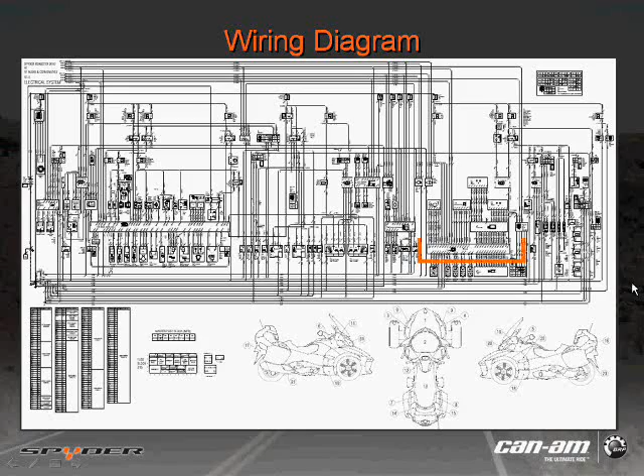Okay, Rich, we're going to start today's training session with component location and how to read the schematic. We'll imagine we're looking at an area of the schematic, and we'll see here RDO 1-25. That would be radio connector 1, terminal number 25.

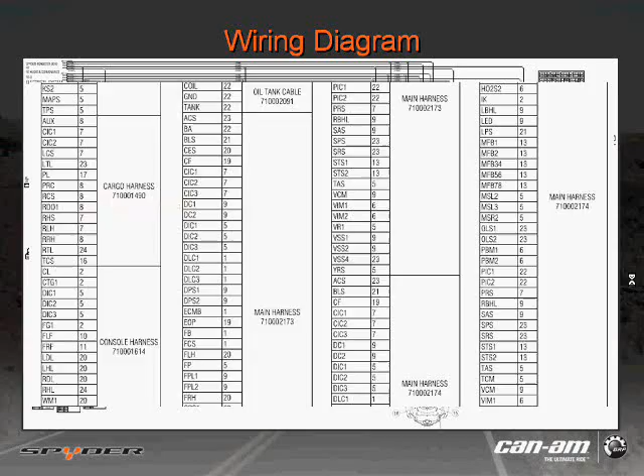To find where that connector is located, go to the bottom left of the schematic and read the small chart. Find connector RDO1 and then reference the small area location number next to it. In this example, it's number 8. Then reference number 8 in the Vehicle Location Area Callout section of the schematic. Here we'll see number 8 is located underneath the right rear.

Next, we're going to reference the area next to the connector location chart, and we're going to take a look at the fuse boxes. This shows the location of the fuse boxes in the rear, or master fuse block, and the front fuse block, known as FB. You can use these to reference the locations of the different fuses on the vehicle, and also the relay locations are located here. In addition, you'll see a series of numbers underneath the lower fuse block from 1 to 12 from left to right, and A to E from bottom to top on the left of the small picture. This is used to determine the terminal locations in the front fuse block.

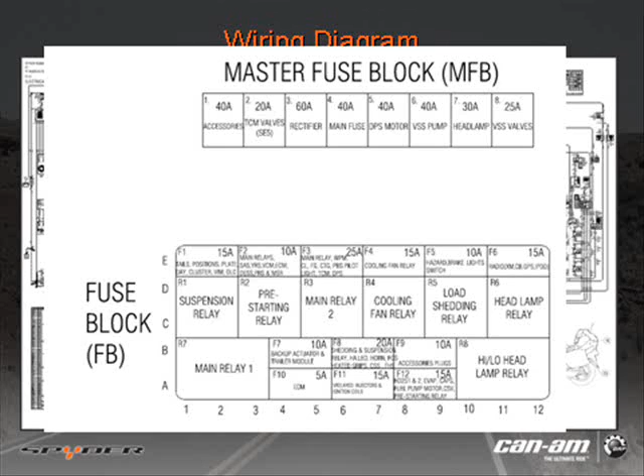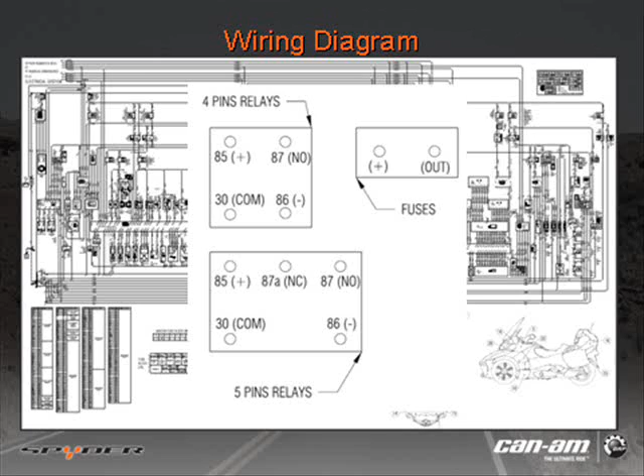Now let's reference the area to the right of the fuse box locations. These are the relay terminals and fuse block terminals as viewed from the fuse block, not from looking at the relay or the fuse itself. The illustration on the top right shows the location of the fuse terminals in the fuse block. On the left is the positive or power supply into the fuse, and on the right is the power supply path to the component from the fuse.

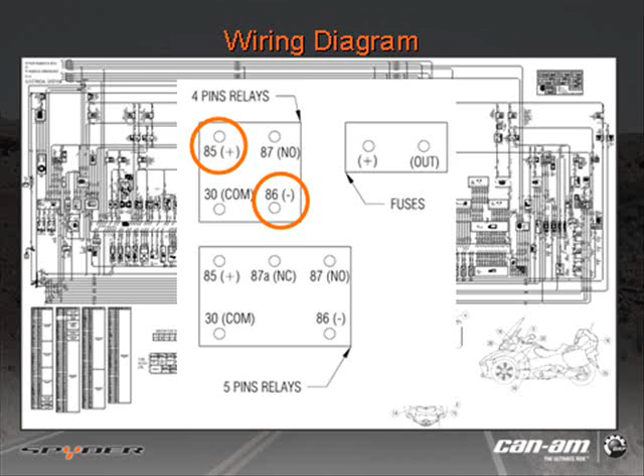Next, let's reference the illustration on the top left. This would be the terminal locations in the fuse block for a 4-pin relay. Note the numbers 85, 87, 30, and 86. These are the numbers that are on the relay, but remember you're viewing it from the fuse block, not the relay. There's two small circles, one on 85 and one on 86. The 85 is the positive side coming into the relay for the low current side, and the 86 is the negative side, or path to ground, controlled normally by some type of module to turn the relay's low current side on. The low current side is the side of the solenoid with windings that, when energized, create a magnetic field and either open or close a switch. In this case, it closes the switch in these relays.

Now it's important to note that the terminal locations circled here are not the locations listed in this 4-pin relay illustration. We'll reference the load shedding relay to explain this. Note that the power supply coming into the low current side relay at position 85 is in actuality FBD9, which if you look at the reference illustration, you'll see the incoming current side, location 85, is at the top left. Also note that the ground path for the relay to activate the low current side would be the negative one at number 86, but in actuality it's connector FB terminal C10 in the fuse block. Just remember the terminal numbers 85, 86, 87, and 30 are not marked on the schematic.

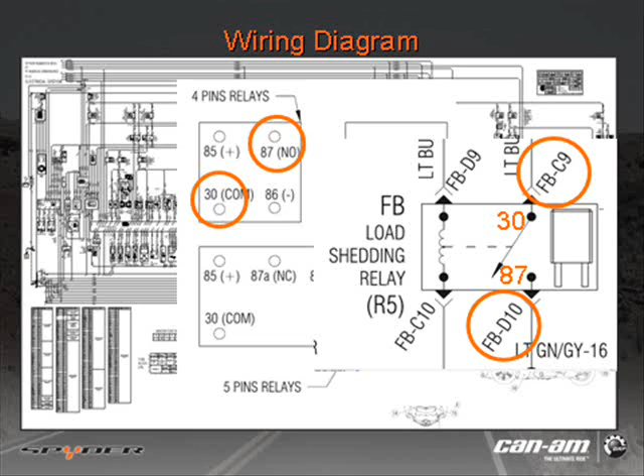Moving on to the high current side or switched side of the relay, number 30 is the common or incoming power side for the switched side, and number 87 is the side the current leaves the relay and goes toward the component it will operate when the relay is energized.

Next, let's reference the terminal locations in the fuse block for the relays. If we reference A to E from bottom to top and 1 to 12 from left to right, we can determine the accurate location of the terminals.

Patrick, it's important to remember that the illustration of the relay is there to show how the relay works. Even though it appears that D9 and C10 are directly across from each other, in actuality, on the relay, they are diagonal from each other. So if you look at the fuse block and see C9, D10, C10, and D9, they're actually diagonal from each other. The reason the relay is wired that way is so you could install it in either direction and it'll still work the same way. This normally only applies to 4-pin relays, and we'll talk about a 5-pin relay a little later.

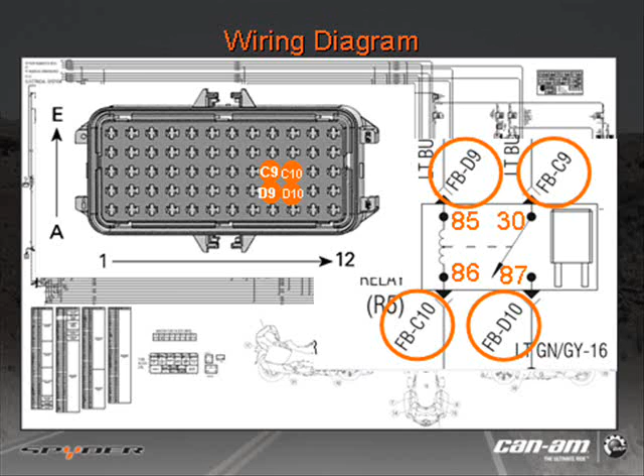Well, look at that, Rich. The next slide is the 5-pin relay. For this explanation, we're going to use the high-low headlamp relay R8. A 5-pin relay can be used for 2 outputs, one in the energized position and one in the unenergized position. We'll explore that in a moment.

First, let's take a look at terminals 85 and 86, which are still the low current side of the relay, and we can see their positions are diagonal when viewed in the fuse block. Now let's look at the high current side of the 5-pin relay. Number 30 is the incoming power or current, but we have 2 possible outlets, number 87 and number 87A. Number 87A is used as the outlet path through the relay when the relay is not energized. On this next slide, we'll see that with the relay energized, 87 becomes the outlet path for the current.

Okay, Pat, even though it seems like we're rambling on about relays, it's extremely important to understand the purpose of relays, how they work, how they are illustrated on the actual wiring diagram, and where the actual pin locations are in the various fuse blocks. This is absolutely critical when diagnosing components or circuit issues.

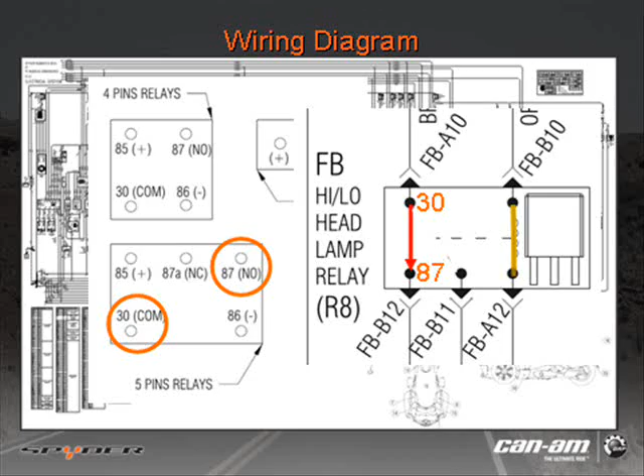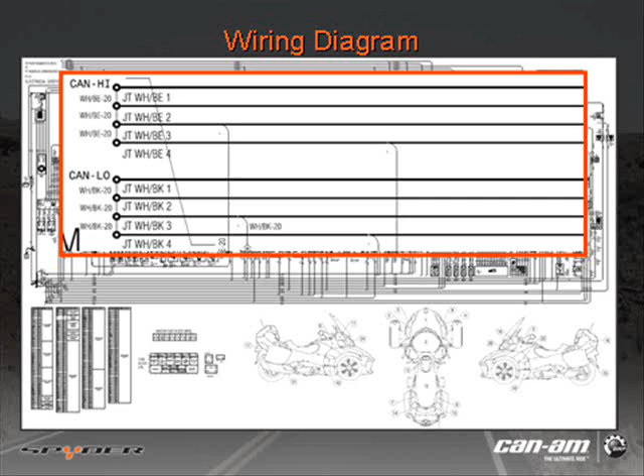Okay everybody, next we're going to continue reading the rest of the schematic. We'll begin with the top, where you'll see the circuitry for the CAN high and CAN low communication wires.

The CAN, Controller Area Network Protocol, is an ISO standard for serial data communication, developed for automotive applications. The CAN bus links several ECUs and sensors in the vehicle's electrical system. Two wires connect each component, constantly communicating at a rate of about every 25 milliseconds. The white-black wires are CAN low, and the white-beige wires are CAN high.

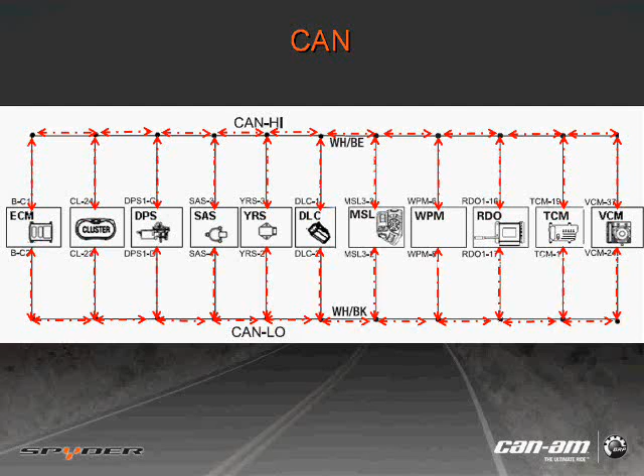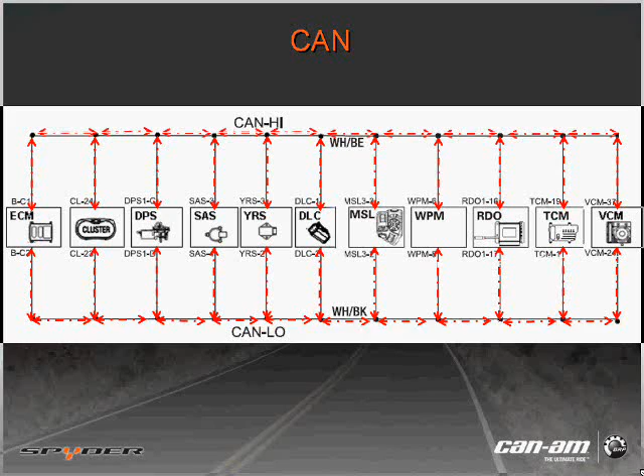The CAN wires also provide communication with BUDS when connected through the diagnostic connector. Consider the CAN wires like a telephone line where the modules are constantly talking with each other really fast so they can stay updated on the latest information and take action as necessary.

The CAN bus system integrates several electronic control units into one communication loop. The units in communication are: the radio, the RECC or multi-function switch left, the cluster, the WPM windshield and park brake module, the ECM, the DPS dynamic power steering, the SAS steering angle sensor, the VCM vehicle control module also known as VSS vehicle stability system, the TCM transmission control module if so equipped, and the YRS yaw rate sensor.

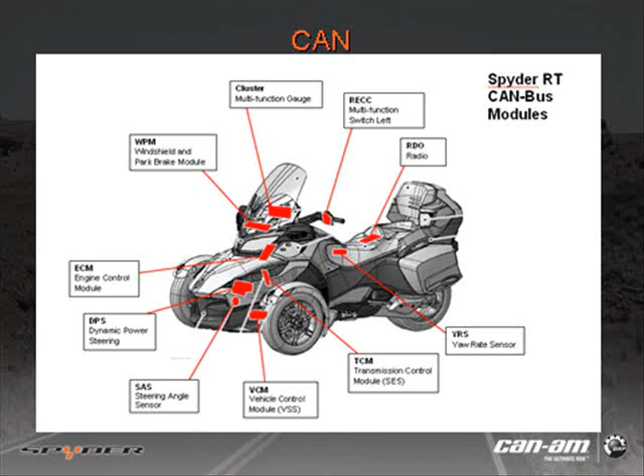If we look at the upper right corner of the schematic, we'll see a small area that lists the switches in the left multifunction switch that use CAN communication. Remember, these switches can only be tested with BUDS.

In addition, the signals from the cruise switch located on the right multifunction switch are sent to the left multifunction switch, and those signals are also converted to CAN. Let's make it clear that the cruise control switches on the right-hand multifunction switch are normal contact switches, and they can be tested with a multimeter at normal wire and connector locations as identified by the wiring diagram. Once these connections are made at the multifunction switch on the left, they are converted to CAN inside that module.

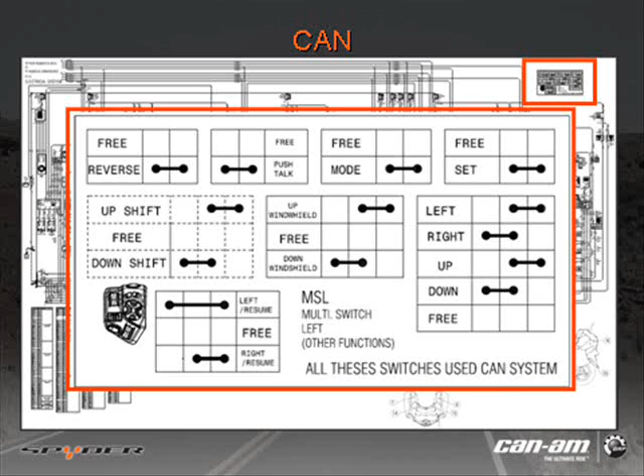Now moving down the wiring diagram, the next thing we see are the high amperage fuses. These are located in the back of the vehicle, and they're the very high amperage or large square fuses. They're all connected to a large bus bar directly connected to the battery. They feed the main power to the main fuse assembly, the lights fuse, TCM solenoids, DPS motor, VCM valves, the VCM pump, and the main accessory fuse.

Next down the wiring diagram, you'll see the lower current fuses, which are in the front fuse block. There are several accessories and components operated with these fuses, and the fuse locations and wire terminal connections can be identified from this wiring diagram.

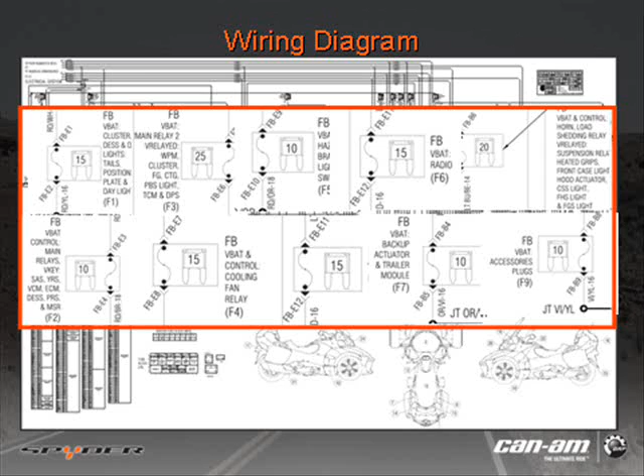For example, take a look at the accessory plugs fuse over to the right of the screen. It's a 10 amp fuse. We can see that fuse is in location F9, fuse location 9. Its terminal connections are FB B9 and FB B8.

Even further down in the wiring diagram, we see the next row, the relay section. Here you can see the main relays, the cooling fan relay, the headlamp relay, and the load shedding relay, which Patrick will talk about a little bit later.

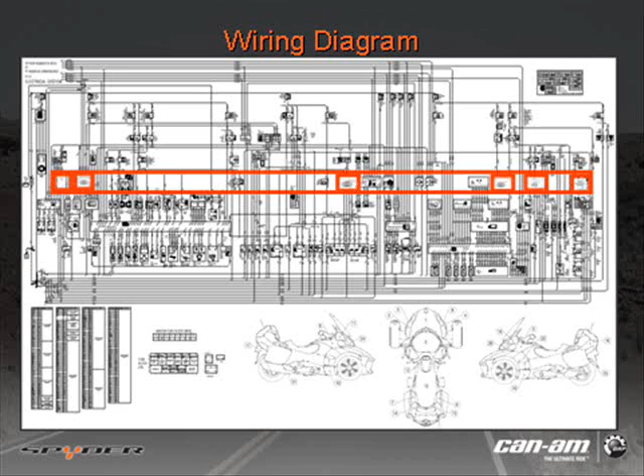I'd like to talk about the next portion further down the schematic, because this area can be confusing for some technicians. What you'll see is some components are split up into different segments. I'm going to use the cluster as an example.

The multifunction gauge or cluster is split up into several areas across the schematic. You'll see that it's actually split into 6 separate segments across the schematic.

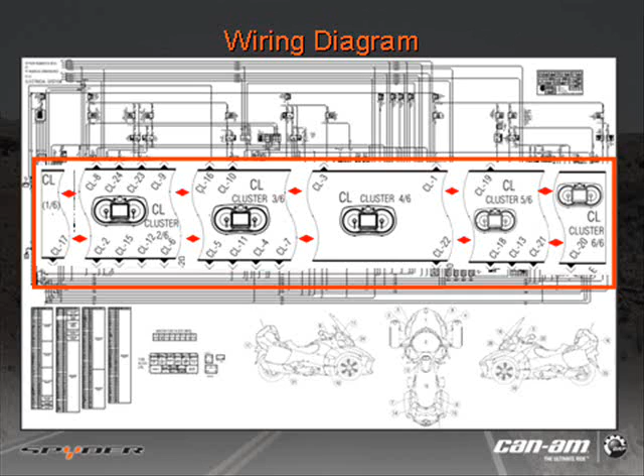Depending on the component, sometimes, as in this case, you'll see a curvy line at the sides of the instrument cluster as it's split up. But in some cases, it'll just say 1/2, 2/3, etc., indicating there would be 1 of 2, 2 of 3, 3 of 4, 4 of 5, and so on. That's just something to be aware of as you're looking for different pieces of components across the entire schematic.

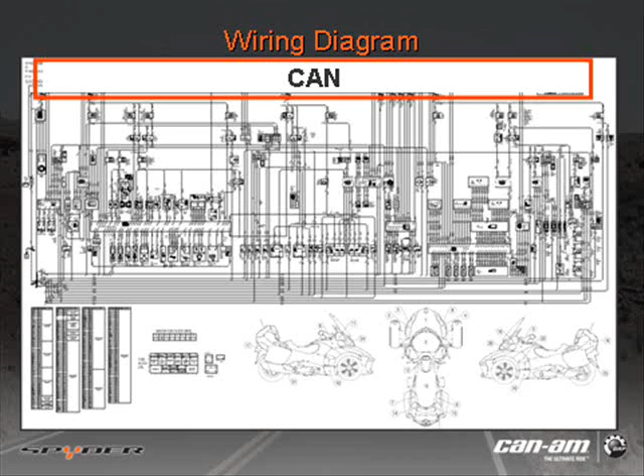I want to come back to the schematic and summarize the different areas located on it that you may be concerned about. The very top of the schematic shows the CAN routing. Right beneath that would be the area showing your 12 volt positive supply side of the system, which is the supply from the battery to the various components.

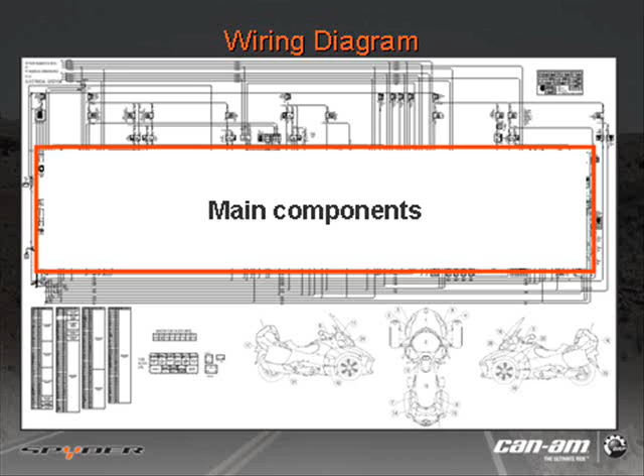Now in the center of the schematic would be the location of the main components, things like the ECM, the radio, the VCM, and various other components in the RT system.

Now located at the bottom of the schematic, somewhat overlooked by a lot of technicians, is the 12 volt ground path from the components back to the negative side of the battery, or the ground, commonly considered the ground of the system.

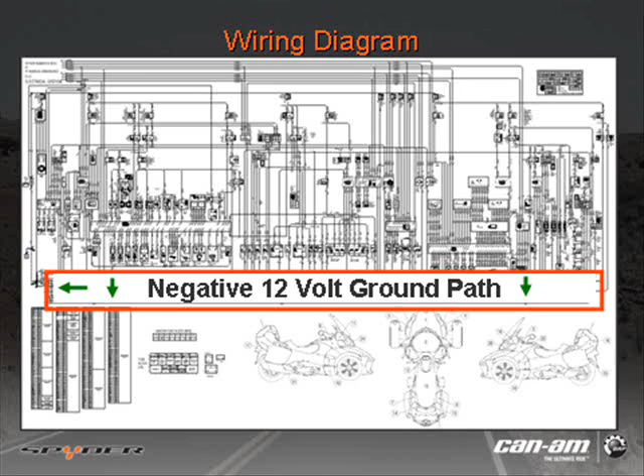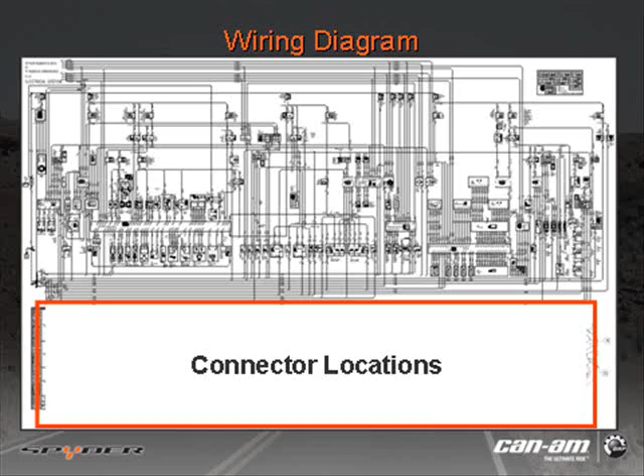Now all the way at the bottom of the schematic is, as we discussed before, the connector locations, terminal locations, and locations for the fuse block and relays, things like that.

Now we want to discuss power distribution. What is the sequence of events that happens to get all the modules on the RT vehicle to power up when the ignition key is turned on?

You'll see that power is supplied from the battery at all times to both main relay 1 and main relay 2, and also the ignition switch. At both main relay 1 and main relay 2, there's power at all times to the low current side of the relays, and also the high current side of both relays. And you'll notice at the ignition switch there's power hot at all times located at 2 locations at the ignition switch.

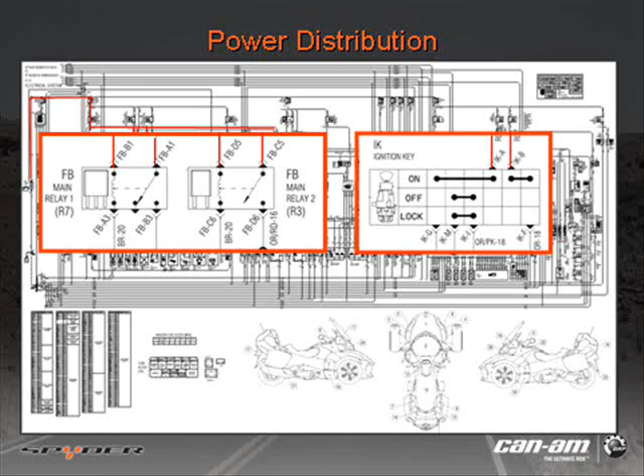Now what turns on main relay number 1 and main relay number 2 is the ECM, or engine control module. That's actually what activates the ground side of both relays. When the ignition switch is turned on, current flows through the ignition switch and then enters the ECM at terminal A2. This activates the ECM.

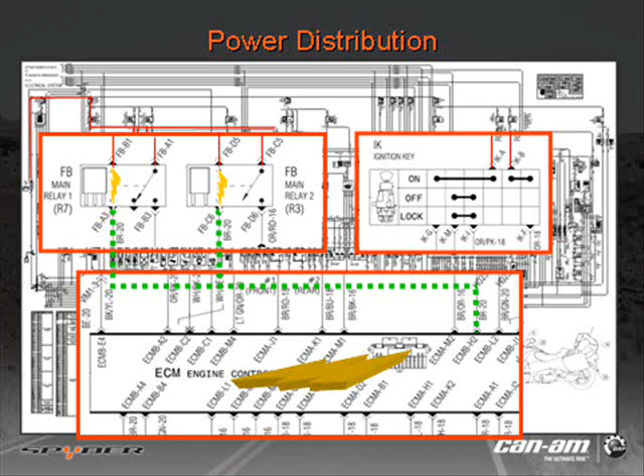Once the ECM has been activated, the ECM can then send a ground signal from terminal H2 of the ECM to each relay, both main relay number 1 and main relay number 2. At that point, both relays are now activated, and with the relay activated, the contacts now close. Then the power can distribute to the necessary modules through main relay 1 and main relay 2.

Now we're going to talk about power distribution to something called the non-critical loads. Non-critical loads would be the hood actuator, front compartment light, front and rear heated grips, and the air-controlled suspension on the RTS model.

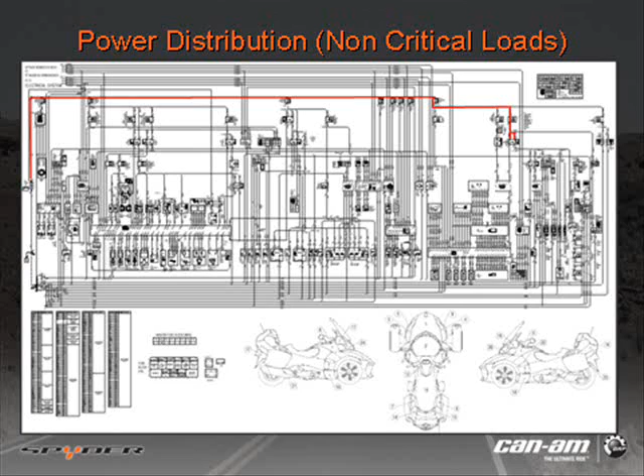Power distribution to the non-critical loads comes through something called the load shedding relay. It's called the load shedding relay just in case the battery voltage drops below 11.8 volts, it'll shed the non-critical loads. So that relay would be turned off, and then the power to the non-critical loads would be shut off.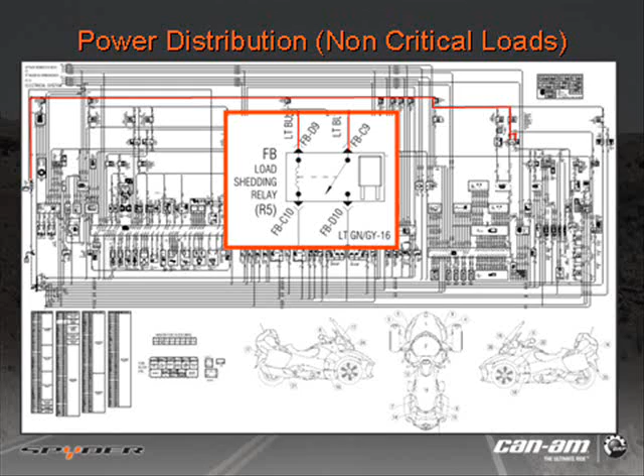Now the load shedding relay is supplied to ground not by the ECM but by the instrument cluster, which is a module itself. That ground from the cluster is supplied from terminal CL number 19 at the back of the instrument cluster.

As long as the system voltage is over 11.8 volts, the instrument cluster will supply the ground to the load shedding relay. That will activate the relay. Once the relay has been activated, the contacts will close inside of that relay, and then power can be supplied to all the non-critical loads in the vehicle.

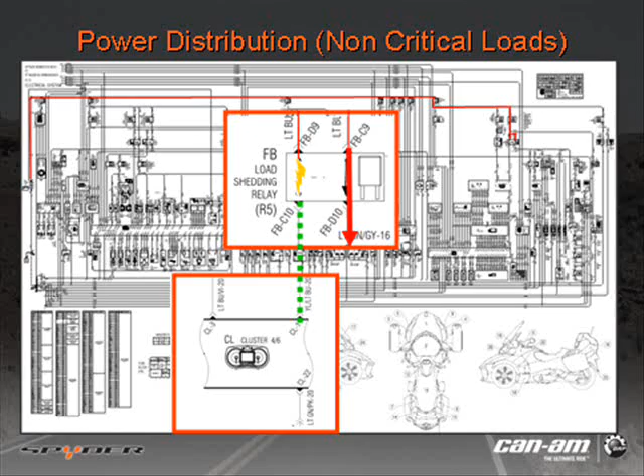Okay, moving along now, let's talk about the windshield park brake module, or WPM. This module is located in the upper console, right in the center, underneath of the windshield. It contains the mechanism to operate the windshield, as well as the module and the motor for the windshield.

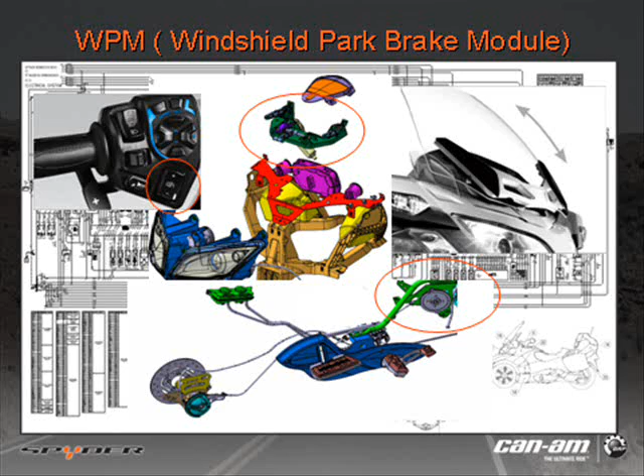In addition to operating the windshield, it also is the module that operates the motor for engaging and disengaging the parking brake. Okay, now let's take a look at the basic operation of the electrical portion of the windshield park brake module.

Let's start by talking about what components are involved in the windshield park brake system. First, there's the WPM module. There is the parking brake switch located on the center console. There is the windshield up-down located in the left-hand multi-function switch.

In addition, there's the windshield motor, which is located on the WPM module. Also included is the parking brake motor. And finally, we have the parking brake switch, which is located on the front bell crank for the parking brake actuator.

Okay, now for operation, the first thing is power is supplied to the WPM module from main relay number 2 to terminal number 5 of the WPM once the electrical system has been activated. Next, the ground comes in at terminal number 7 at the WPM.

Alright, first we're going to cover operation of the windshield. The signal is sent from the left-hand multifunction switch to the WPM when either the up or down windshield is selected. Now, it's important to note that this switch is a CAN signal, so it's converted to CAN since the left multifunction switch is a module. And as we stated before, it can only be tested with BUDS.

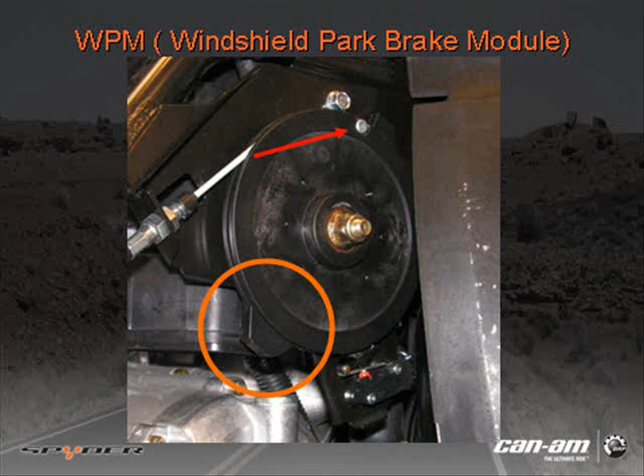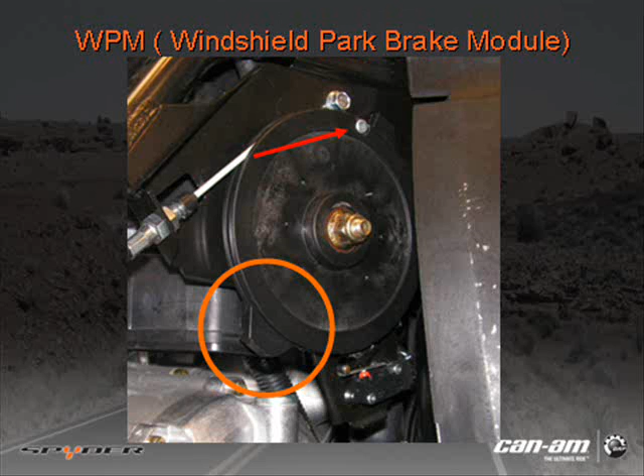You'll note that the parking brake pulley in the front rotates forward, pulling on the brake cable. At the same time, the protrusion is moved away from the micro switch contact. When the protrusion moves away from the micro switch, a ground is then supplied through that switch to the WPM module.

When that ground is applied, the WPM is calibrated to determine that the parking brake is in the applied position, and begins to look for the threshold amperage to stop the current flow to the motor.

Additionally, the ground through the switch also directs that ground signal to terminal number 17 of the multifunction gauge, and the multifunction gauge knows that the brake is in the applied position.

If there is no ground signal to terminal number 17 at the cluster, and the electrical system is shut down by the ignition switch being turned off, the backup warning alarm will sound. The ignition switch will need to be turned back on, and then the parking brake applied before the ignition is turned off again.

Some additional information here is that each time the electrical system is powered up and the parking brake is tried to be released by activating the switch, the WPM module will try to apply the brake first, so it'll take 2 clicks, 2 pushes of the switch to release the brake each time the electrical system is powered up. After that, during the cycle, it will only take 1 push to either engage or disengage the brake switch.

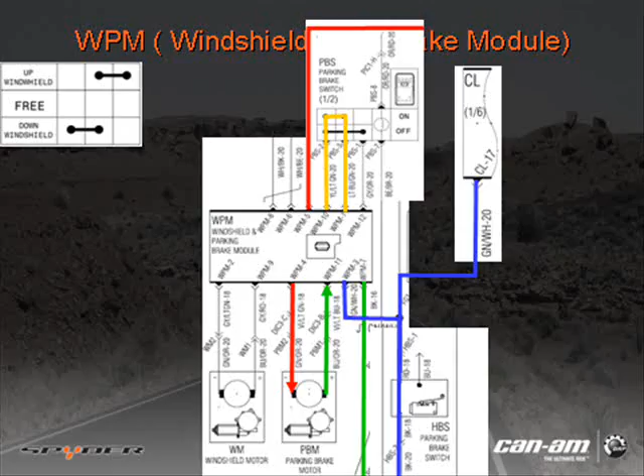Okay, Pat, thanks for that explanation of the WPM. Before we move on to the engine management system, I'd like to remind everyone how important the wiring diagram really is. Not only is it your number one tool for doing diagnostic work on any vehicle, it's also your number one training tool.

Good technicians will look at a wiring diagram and train themselves to understand how things work. If you want to know how a WPM works, or one of the many components on the vehicle, simply look at the wiring diagram, and when you understand it and understand what Patrick is telling us here, you'll be able to easily understand how that component or circuit works.

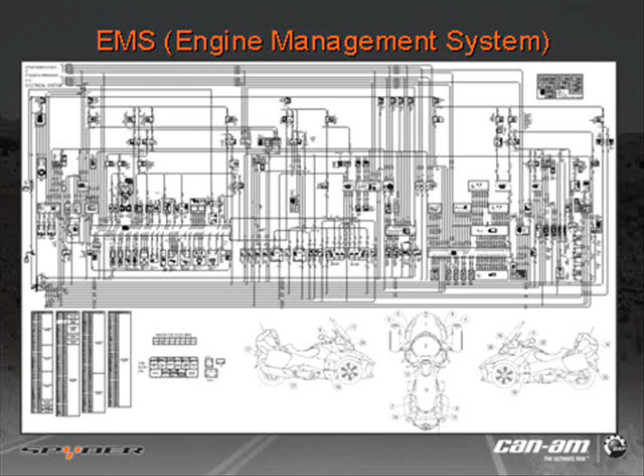Our newer wiring diagrams actually show the inside of various sensors and components, so you can see what's going on inside, and good technicians can understand exactly how a system works simply by looking at the wiring diagram. So again, it's very important to understand what the components are, where they are, and how to read the wiring diagram.

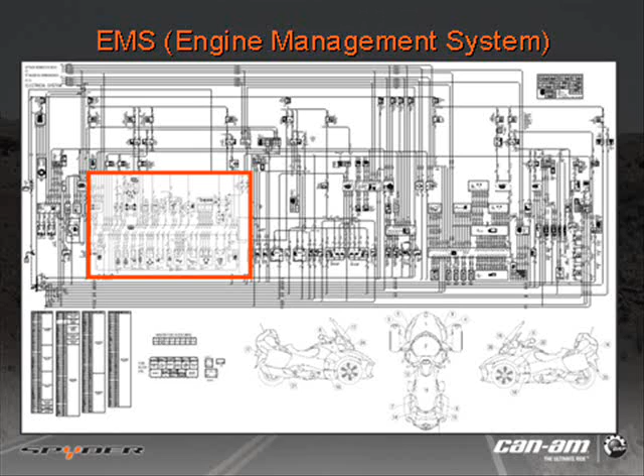Okay, let's continue on. The engine management system is basically the same as the Spyder GS or RS models. The only thing we're going to talk about in this training material is the differences on the Spyder RT.

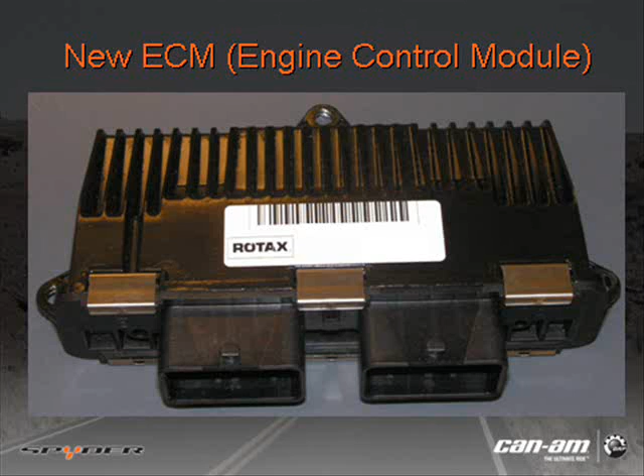The first thing we'll notice is that the engine control module, or ECM, is different on the RT. It's a new component, and since it has different wiring connector blocks, we'll need a new tool for doing pinouts and testing of the wiring harness coming to and from the ECM.

Also, you'll notice that the RT has two heated oxygen sensors. These can be seen on the wiring diagram as HO2S1 and HO2S2. Having two oxygen sensors rather than one, like on GS and RS models, allows us to have a more finely tuned calibration and more carefully monitored output.

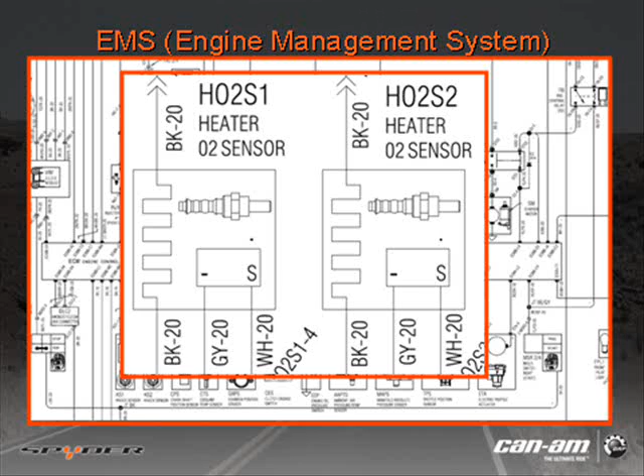You'll notice inside the heated oxygen sensors there's a heating element. This heating element allows the oxygen sensor to produce its reference voltage sooner after the engine starts. The reference voltage that is produced is actually comparing the amount of oxygen in the exhaust gas.

A voltage of 0.1 to 0.9 volts is what is measured. Between 0.45 and 0.9 volts would indicate a rich condition, and from 0.1 to 0.45 volts would be a lean condition. By monitoring this voltage, the ECM can adjust the engine mixture accordingly for optimal performance and minimum emissions.

For more information on oxygen sensor operation and theory, as well as the combustion process, refer to the BRP Guide to Service Fundamentals textbook, part number 484-800-168.

Okay, Patrick, what's next?

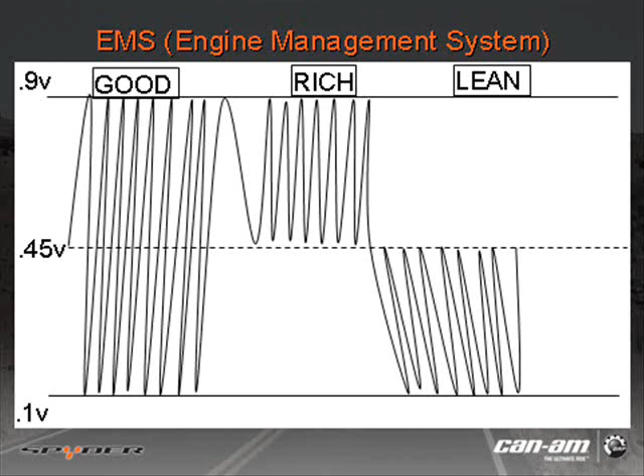Another thing that's unique about the RT engine is that it has two knock sensors, piezoelectric knock sensors, one located on each cylinder. Each of these sensors contains a piezoelectric crystal that will generate small amounts of electricity when it is vibrated.

Now obviously it vibrates the entire time the engine is running, so it's always producing electricity. However, the ECM is programmed to detect the frequency of detonation.

So if for some reason somebody used a lower octane fuel than they should, or they had some degraded fuel, and the engine were to have a detonation situation, the knock sensor would detect that frequency of detonation, compensate by increasing the amount of fuel into each individual cylinder, and keep adding fuel until the detonation were to cease.

This brings us to why it's so important that the recommended fuel octane of 91 octane is used in the RT vehicle. If 87 is used, the knock sensors will both detect detonation in the individual cylinders and increase the amount of fuel to the cylinders.

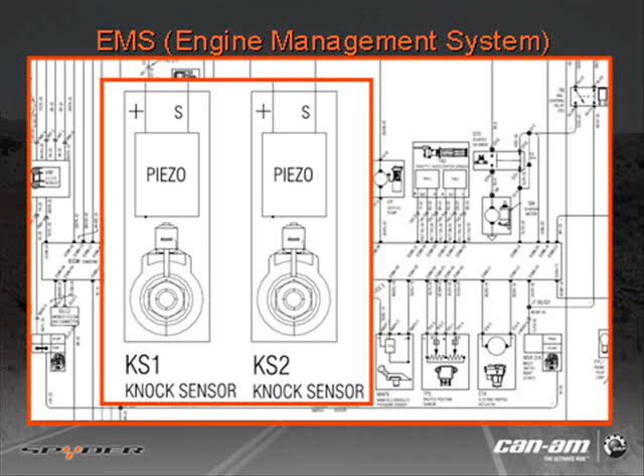It won't hurt the engine, but you will consume more fuel than you should be using. So make sure that you use the correct octane fuel, or recommend to your customers to use the correct octane fuel. Something totally new on the RT platform introduced this year is the ETC, or electronic throttle control.

The ETC eliminates the need for a throttle cable from the twist grip down to the throttle body. There's one actuator and one sensor incorporated into the system. The TAS, or throttle accelerator sensor, replaces the cable-operated twist grip. The ETA, or electric throttle actuator, is the actuator that actually moves the throttle plate at the throttle body.

The throttle accelerator sensor incorporates a dual output Hall effect sensor. It puts out two linear voltages. One is used for redundancy in case one were to not be recognized. The linear signals generated by the dual output Hall effect switch are sent to the ECM.

The ECM in turn interprets the signals as a position of the twist grip, and in turn sends an electrical signal to the electric throttle actuator. It can then accurately control the throttle plates in the throttle body.

One important thing to remember about the electric throttle actuator is to never put a voltage signal directly to the actuator, as it will permanently damage the actuator. Complete diagnostics are outlined in the shop manual. By incorporating ETC into the system, it was easy to add an electronic cruise control function to the RT platform.

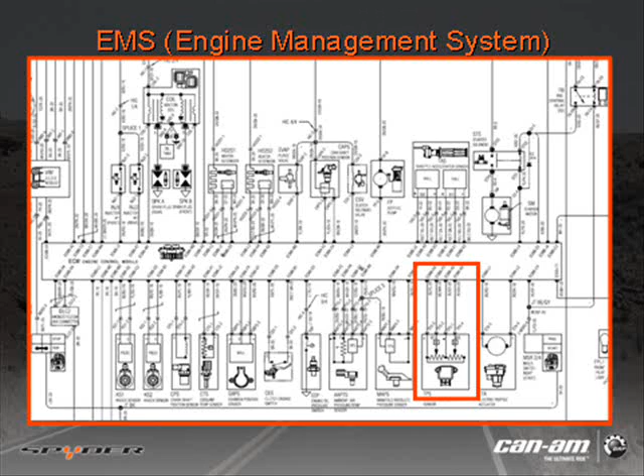Another item that's new in the EMS system is the TPS, or throttle position sensor. Instead of being a single linear voltage dividing circuit, you'll notice it incorporates two. Again, it has two separate sensors inside of one sensor, just for redundancy purposes in case one signal is not recognized.

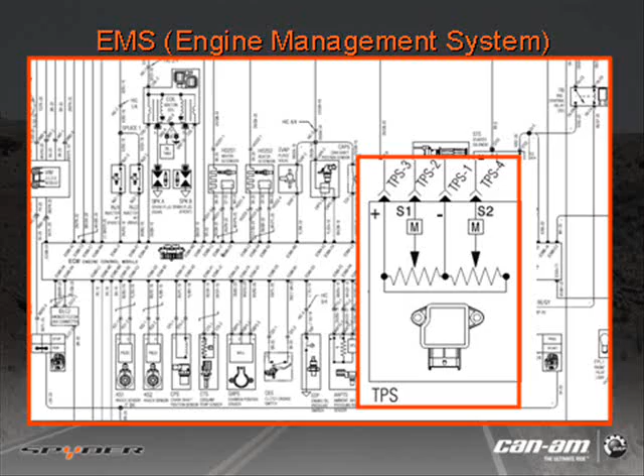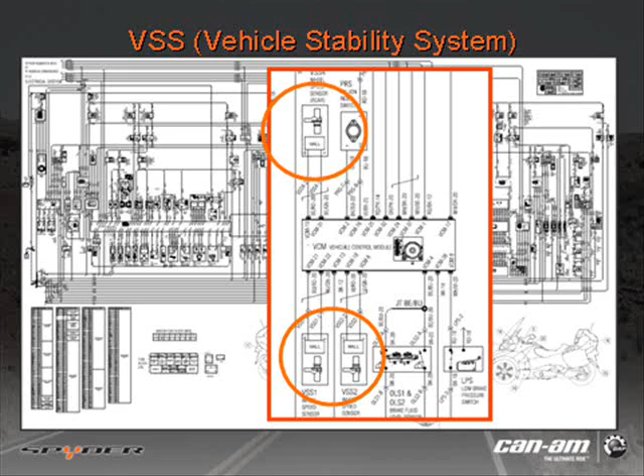Okay, what I'd like to do right now is talk about the differences in the vehicle stability system. There's only really one big difference, besides some very minor calibration changes, and that's that now there are only 3 wheel speed sensors incorporated. Before there were 2 in the rear on the RS and GS models. Now there's only 3 sensors, 1 per wheel, so it'll be quite noticeable when you see it in the shop.

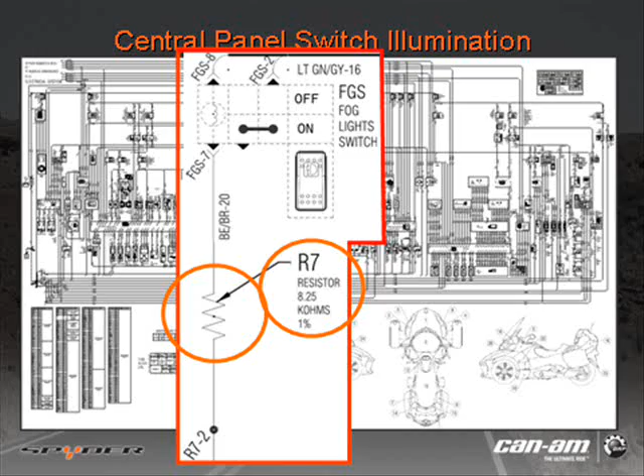You're going to see a resistor in line. That's an 8.25 k ohm resistor, approximately 8,250 ohms of resistance that's been added to the negative or ground side. Not only the fog light switch, but each of the central panel switches has this resistor incorporated into the wiring harness going to the ground. What it does is increase the resistance in the circuit, thus decreasing the amperage flowing through the entire circuit, including the bulb. By doing that, it reduces the intensity of the bulb. If it did not reduce the intensity, it would be too bright, and that could be distracting to the operator of the vehicle.

Let's talk about the hood actuator and front storage compartment light. Available as an option on some models, but standard on the RTS model, is the hood actuator and the front storage compartment LED light. The vehicle is already wired for the hood actuator and the light. The only thing that would have to be installed would be the light, the hood actuator, and the hood or front case opening switch, as it's called, for the front storage compartment.

Power is fed to the central panel switch via the load shedding relay, so the ignition switch has to be in the on position for the hood actuator to operate. Additionally, power is also supplied through the load shedding relay to the LED, or top case LED, which is really the front storage compartment light. Now, the front case opening switch, or front storage compartment switch, supplies a ground. It's a 2-position switch, and depending on the position, whether the hood is open or closed, that's going to determine in which direction the ground would be diverted.

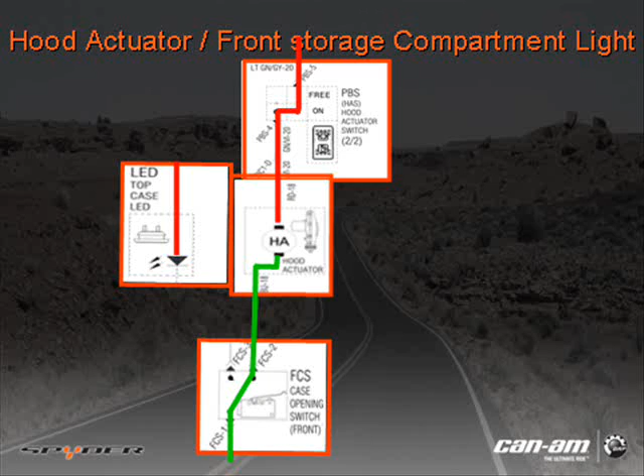If the hood is open, the ground path through the switch would go to the LED light, and the light will illuminate as long as the ignition switch is in the on position. When the hood is closed, the switch is in a position that will supply the ground to the hood actuator. Now the hood actuator won't actuate until you actually push the hood actuator button, and then power is sent through the switch in the central panel to the hood actuator, and the hood would actuate and open up.

Wow, that's a lot of information, Patrick. I think we ought to stop here. Well, Rich, this was the condensed version. Wait till part 4, there's going to be a lot more information in that one too. That's right, and we're really looking forward to that one. Patrick, remember that the wiring diagram is not only an essential tool for proper vehicle diagnostic, it's also an extremely valuable training tool. A lot can be learned by just studying the wiring diagram. Wouldn't you agree? Absolutely, Rich. You know, the best technicians out there would never even attempt to tackle a vehicle electrical issue without first studying the circuit in the wiring diagram.